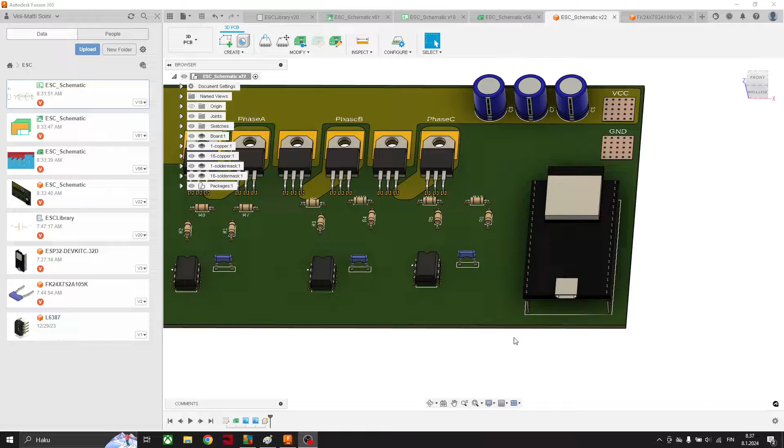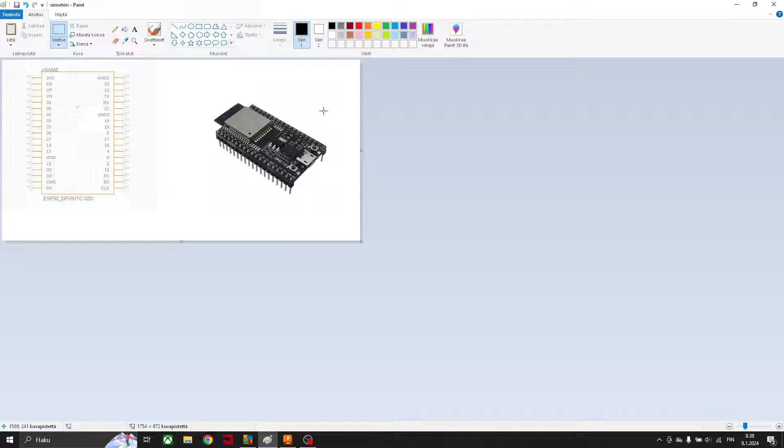In this video I will show you how to create this ESP32 board, so you can use it in some projects like this, this brushless DC motor control project. So this ESP32 is from this. There are not all details, but these dimensions are correct, so it can be used in a project.

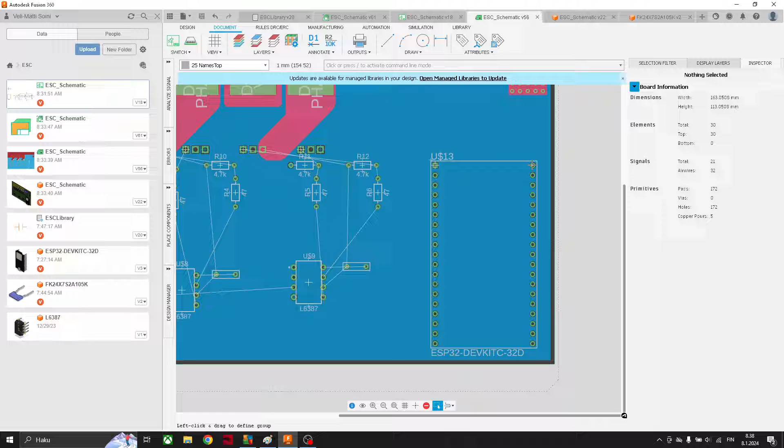So first we will create this symbol which can be used in schematic, and after that we can create this layout, footprint for this component, and last we will create this 3D model.

So I will start by using this library I have created, and I will create a new component. I will name this like this because I already have this component here. And after this we can create this symbol. I'm gonna use this same name.

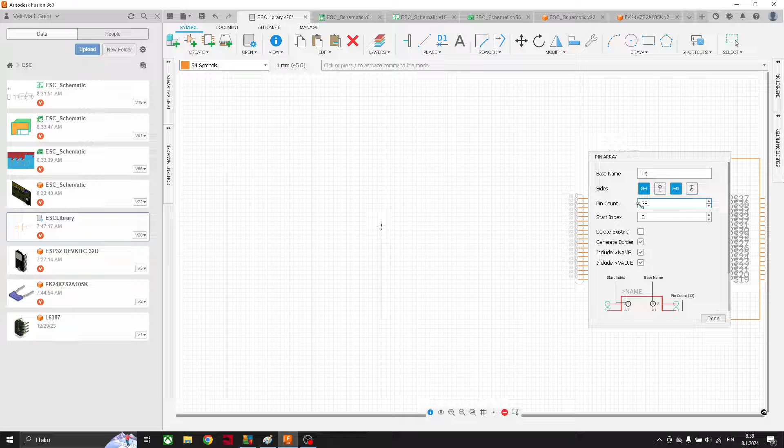From here we can select this pin array, and this ESP32 has 38 pins, so it has chosen from there, and we can place it here. Now we have to make this a little bit bigger, and we can move all these pins here. This will take some time, and I will pause video now.

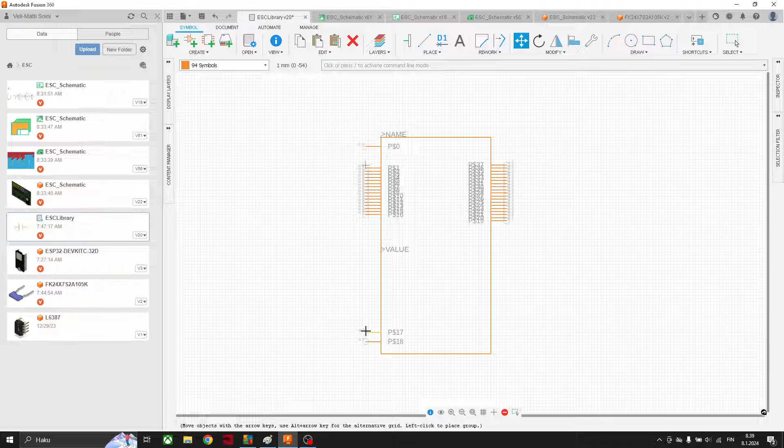So now I have placed all these pins here. Usually I do it like this, that all these have this 1 millimeter and then 2 millimeters on top and bottom. But you can change something else if you want.

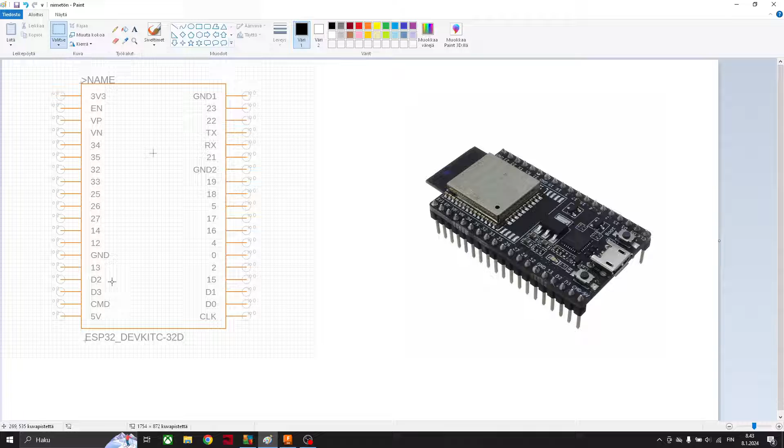Now we can rename all these pins. I have here these pins, which are from the datasheet of this component, so I will use all these same names here. So we can click here, and this first one was 3.3 volt, and then there was this enable pin.

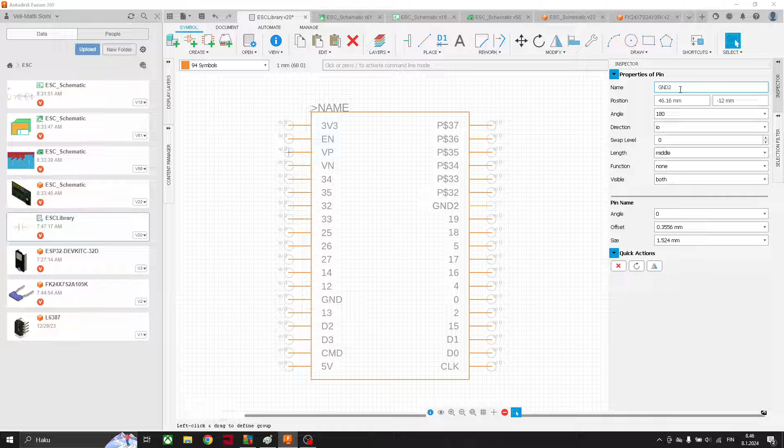And here we can see we already have this ground, and in Fusion we can't duplicate this same ground, so we have to rename it like this ground 2. So now we have renamed all these pins, and we can check that they are all correct.

Then we can add this name for this component. And now we can save this, and then we can start creating this footprint for this.

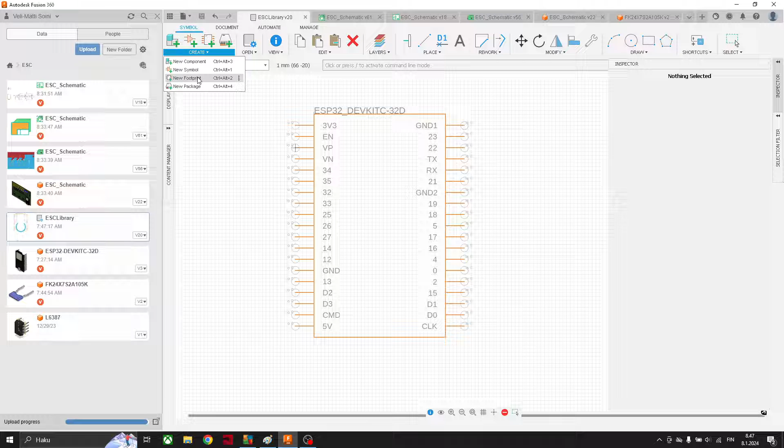So from here we can select this footprint, and from here we can select this one, that array, and again we have this 38 here, and then this pitch spacing is 25.4, and this is 2.54. This is from the datasheet, so we can place it here like that.

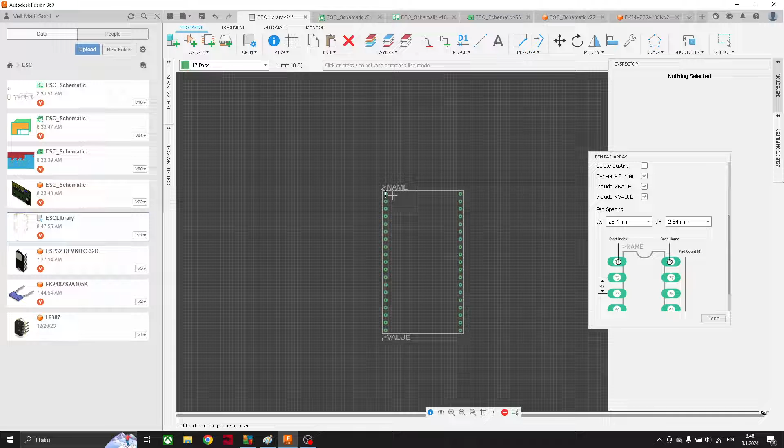And we can change this because this is the first pin here, so we can change this square so it's easier to see.

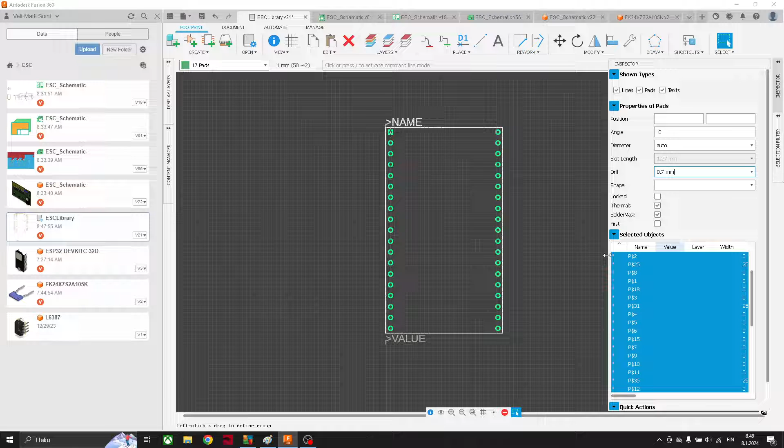And then usually I always also change this drill size a little bit bigger, so there is some tolerance. So we can select them all, and from here, pressing shift, we can select multiple, and I'm gonna change this to 0.7, and now we can see all these holes are a little bit bigger.

Then we can change this also, so it was something like that. And we can save this. Not yet.

We should rename all these pads first, and we should use the same names here. Again, we can start from here, so we just type this, and then this next one, enable pin. And I will pause video now.

So at this point, it is a good idea to double check all these pins match and they are named correctly. I have the ESP32, so I can check from that all these pins are correct.

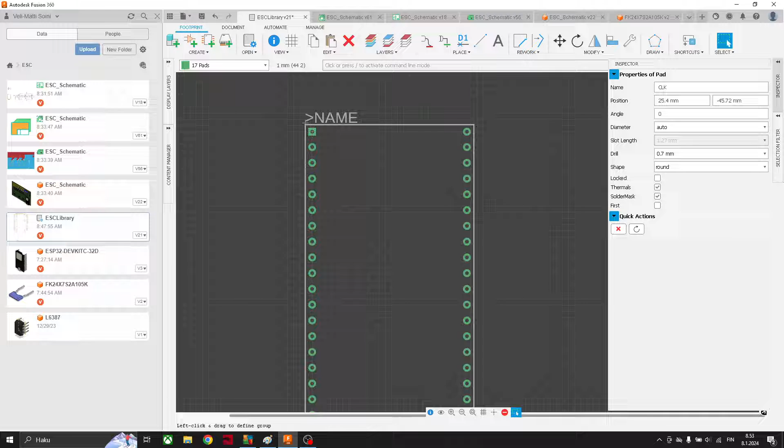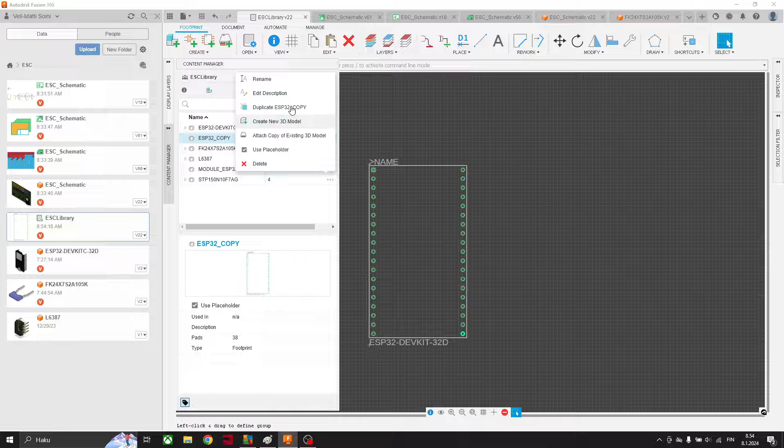And now we can save this footprint. And then we can go to this content manager. So here we have this footprint from this menu, and from here we can click this and now we can create this 3D model for this. When we create the 3D model this way, it's easier because we have this footprint here, so it's much easier to create the 3D model, so it matches this footprint.

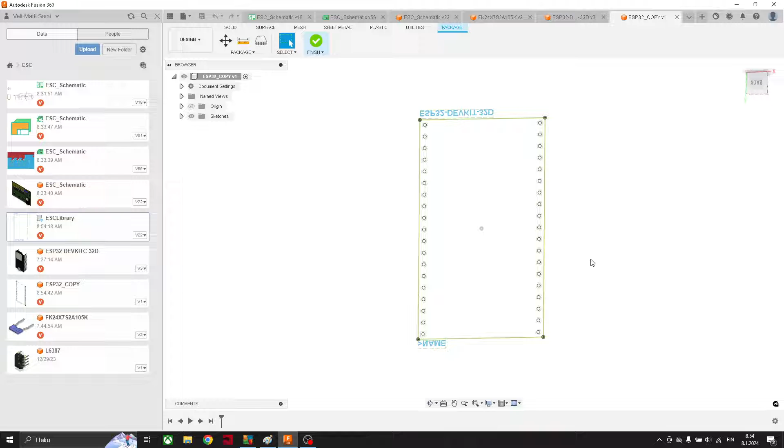So this line here, this is where the PCB is. So if we draw something here, it will be the top of that PCB.

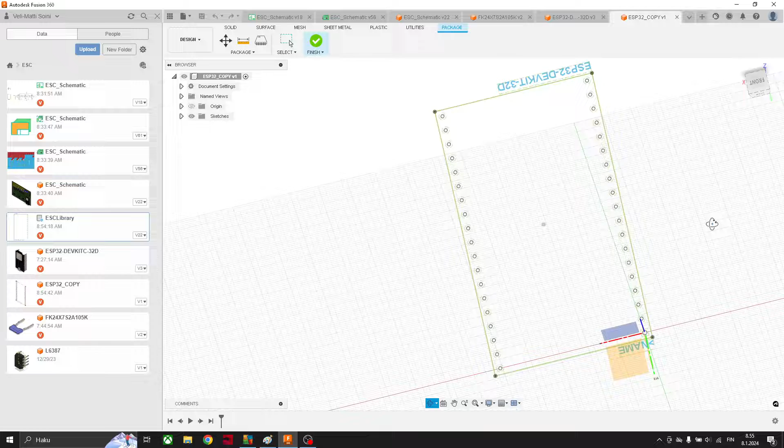So we can start from... okay, so now it's correct. So this front should be upwards. And now we can click from here.

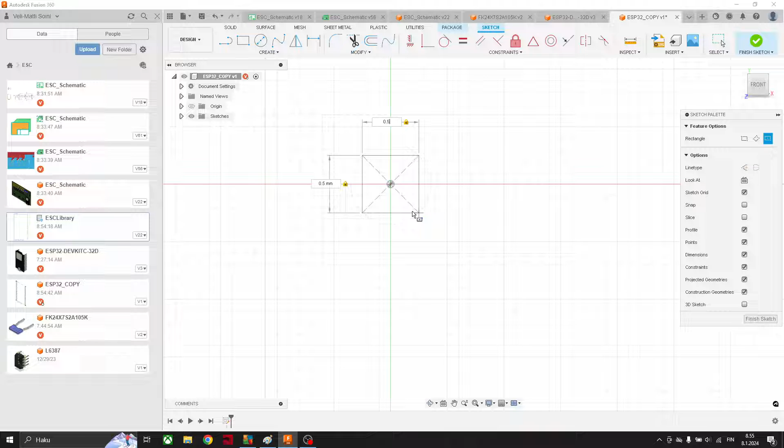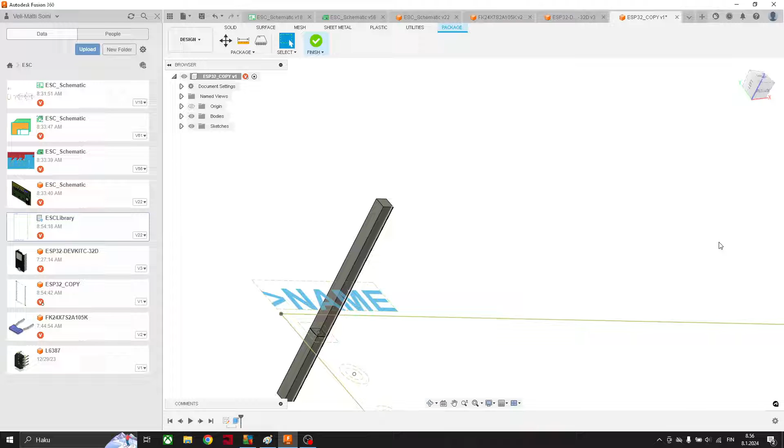So the way I have created this, I first draw this one rectangle here, and it is something like 0.5, and then we can extrude this. We can change these values later, I'm just now gonna use some values here, something like this 3 and 6 millimeters. And now we can change this color for this, I'm gonna use this copper.

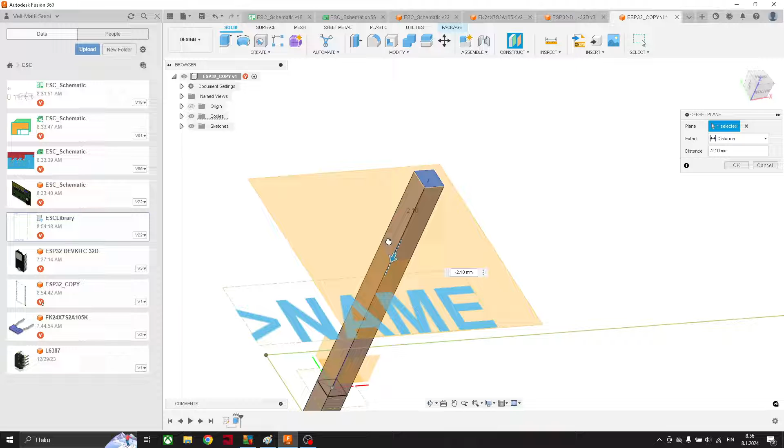And then we can use this offset plane and click from here, so now I start drawing the PCB. The PCB is something like 1.6, and then after that there's a little bit of copper, so we can start it from let's say this 2.1.

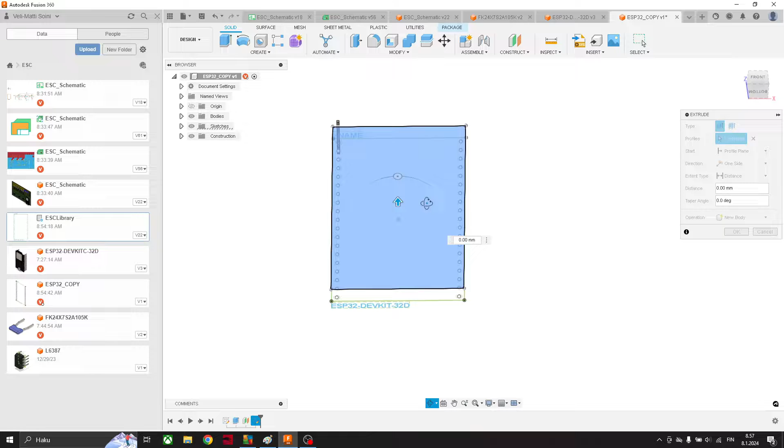From here we click that construct plane, and now we can press P so we can project all these lines from this footprint, and with E we can extrude. I'm gonna use this 1.6, and for this operation we use new body and click OK.

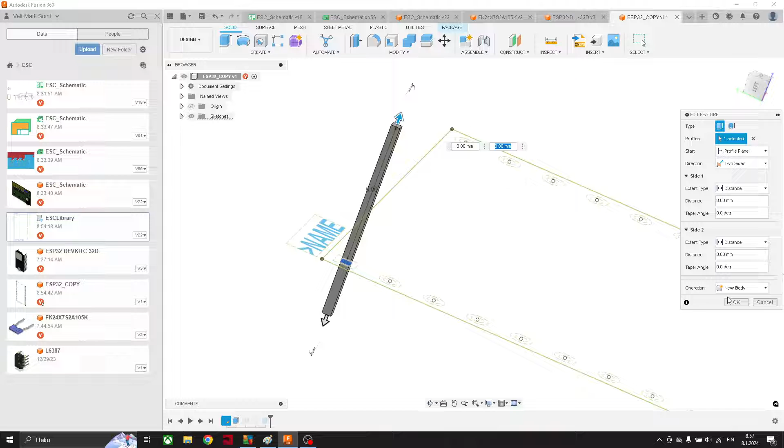Now we can see that maybe this would be a little bit longer, so we can edit from here and just edit this better. So that might be better for now, and then we can create this.

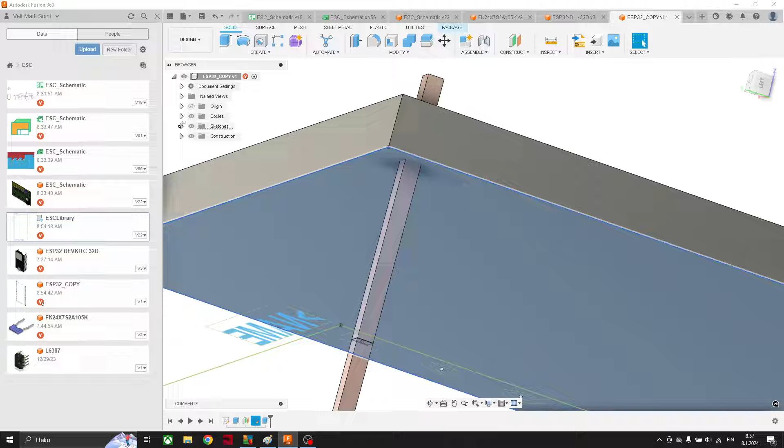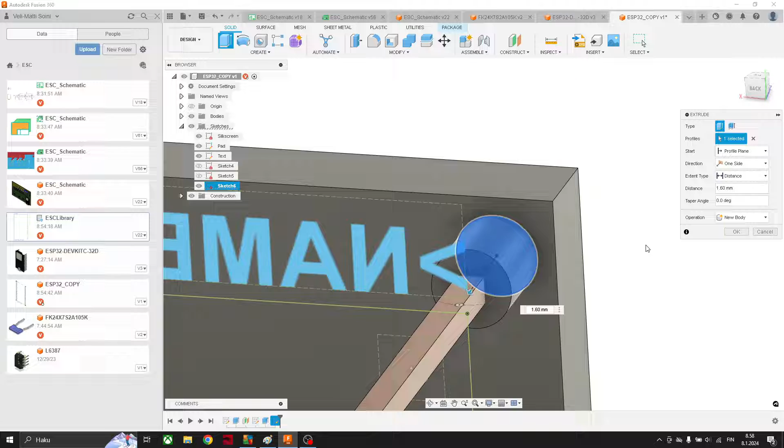We have these plastic things here, so we can create them next. We click, and turn off this sketch first, and click here. The plastic is something like 1.5, and we make new body, and maybe it's 1.5 also, and then we can add color for that.

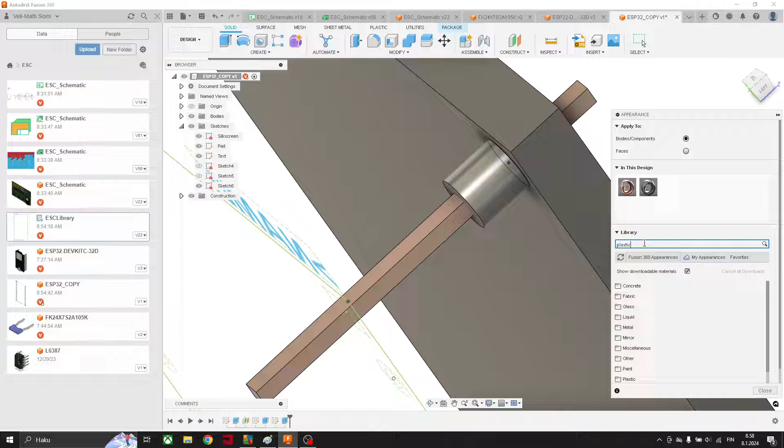I'm using this, and for this color I'm always pressing Ctrl A. So I'm using this one, and now we have that.

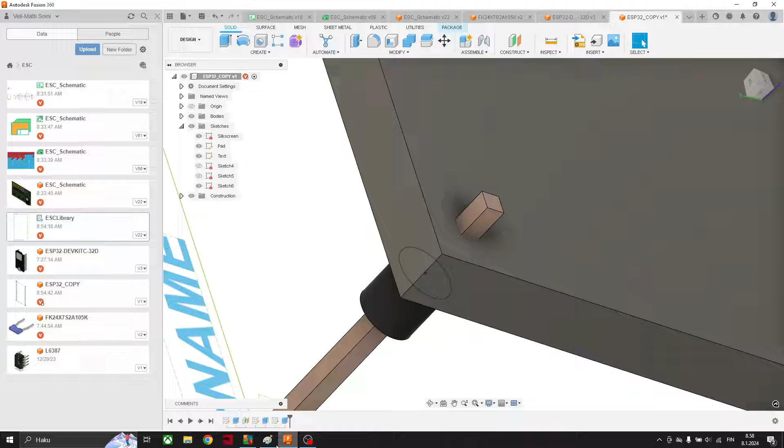After this we can already make a pattern of this if we want. If we want to be more precise, we can also add this shoulder there, but usually it doesn't look very good, but we can try.

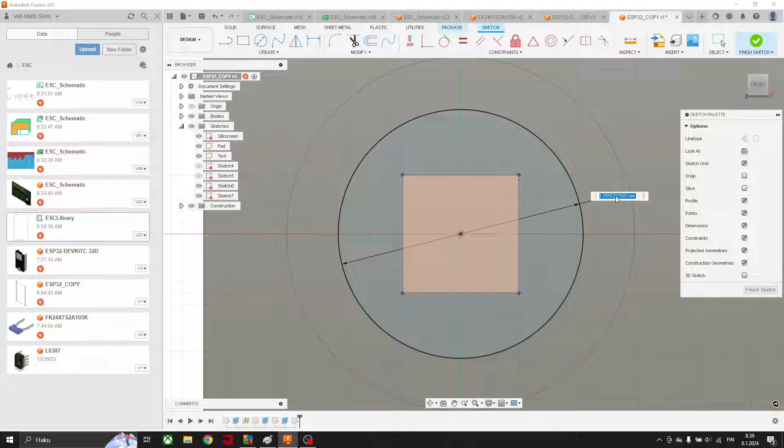I'm gonna project that and then create this circle. By pressing C we can create a circle faster. Let's say this shoulder is something like 1.25.

Then we can extrude that, I'm gonna use new body again, so let's extrude it there. And with this chamfer we can make it look more like shoulder based.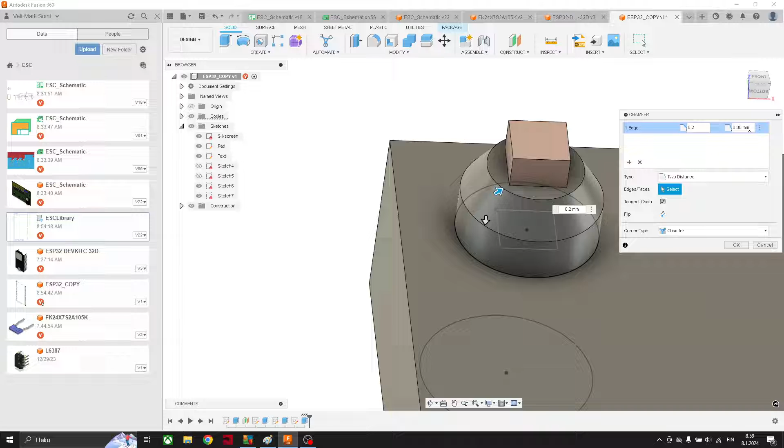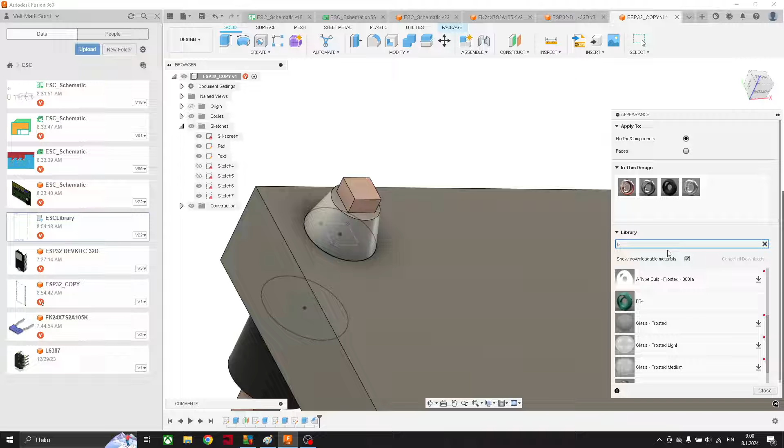Yeah, maybe something like that. Now we can add, here should be this LED, so we place that there. And we can also change the color of this board so it looks a little bit better.

We can edit this FR4 value. ESP32 is something maybe like this. And now we can close this.

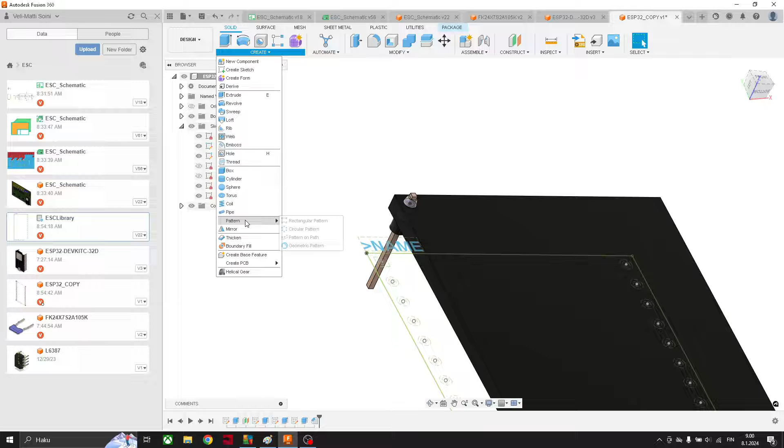From here we can create this pattern. All this is bodies, so we can just click here, and this one, and that - so we have total these 3 bodies here. Then we can select axis, so we click from there and there.

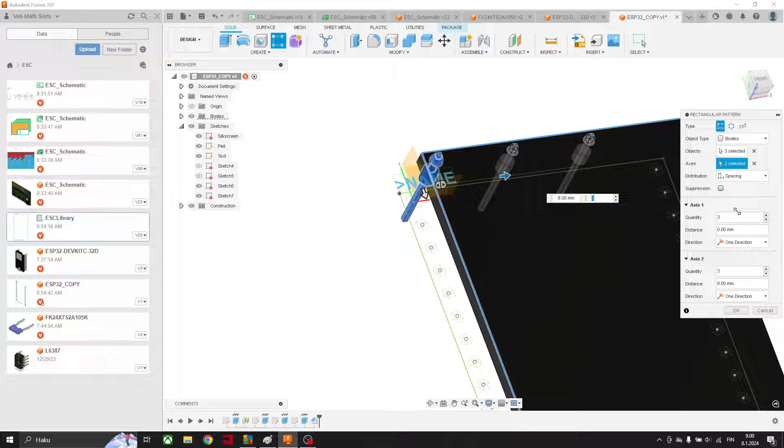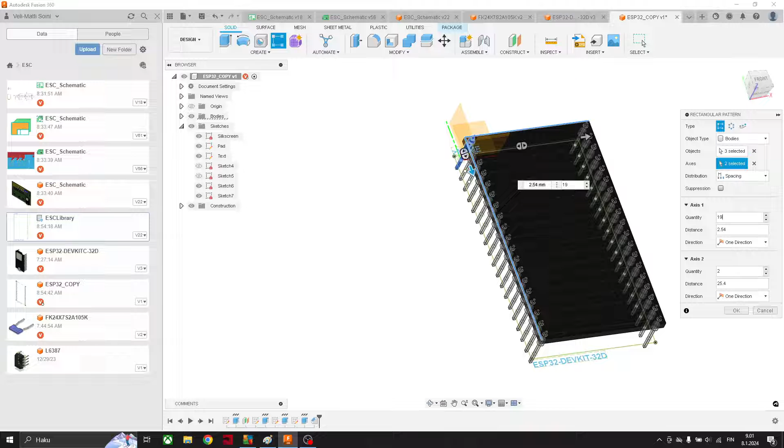I'm gonna use this distribution spacing. So there was 2 and this was 25.4, so it goes there, and then this was 2.54, and there's a total of 38, so it's 19 on one side, like that. And now we have all these pins here.

So it already looks pretty good. Now we can create some USB ports here, so I'm gonna click this. I don't know the real dimensions for this USB port, but I'm just gonna make some placeholder here.

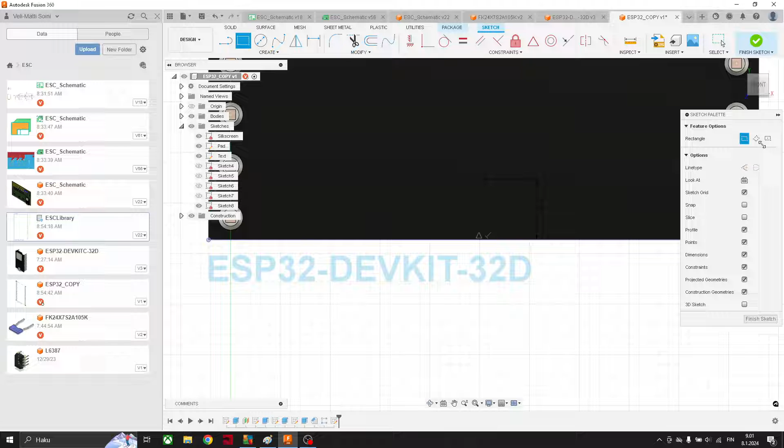So I think it's something like 7 and 7, and this would be like 2.5. Now we can extrude this, it's 2, and new body again.

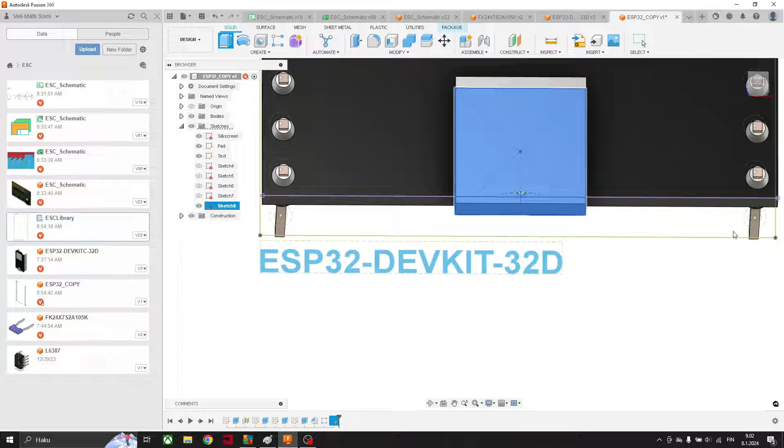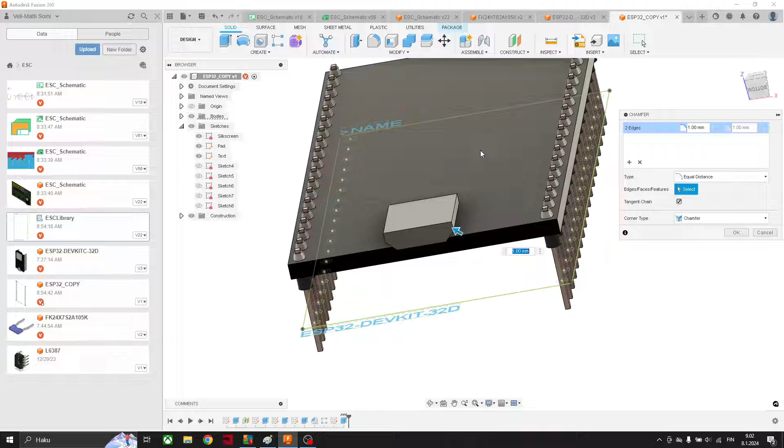And then for this we can change this equal, and it's something like 1 millimeter. So these dimensions don't really matter because this is just a placeholder component. And then this is okay.

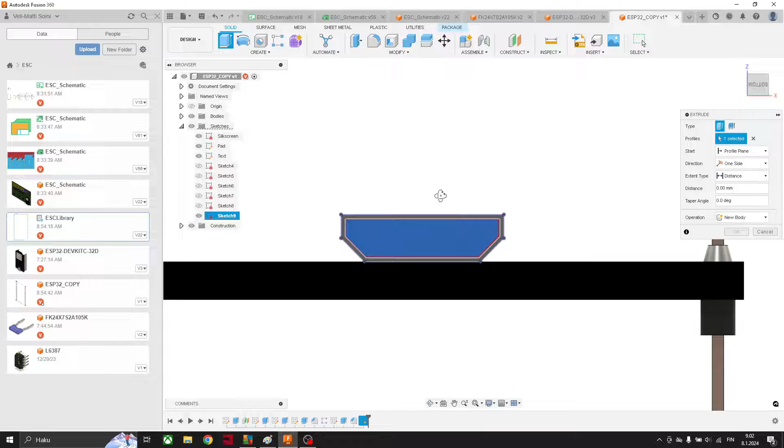Now we can click this and project this, and we can create an offset by pressing O. Let's say this is something like 0.2. And now we can extrude this, and we have this like there, so now it's looking a little bit like a USB port.

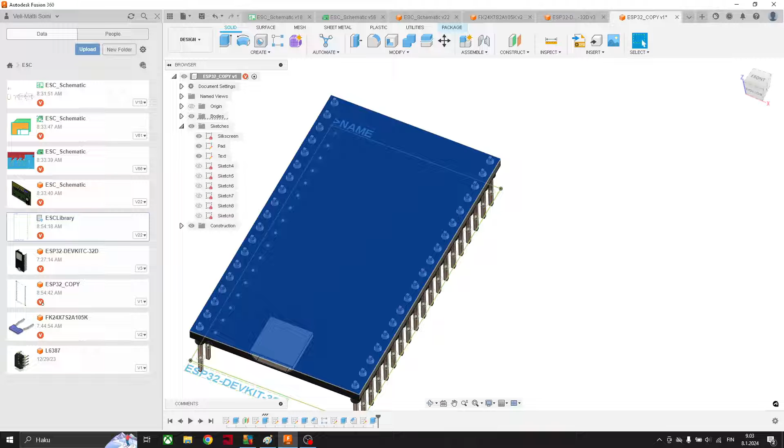And then we can create here this where the chip is. I have to pause the video now because I will check the dimensions, so I will use these dimensions for the chip. So we can start from here.

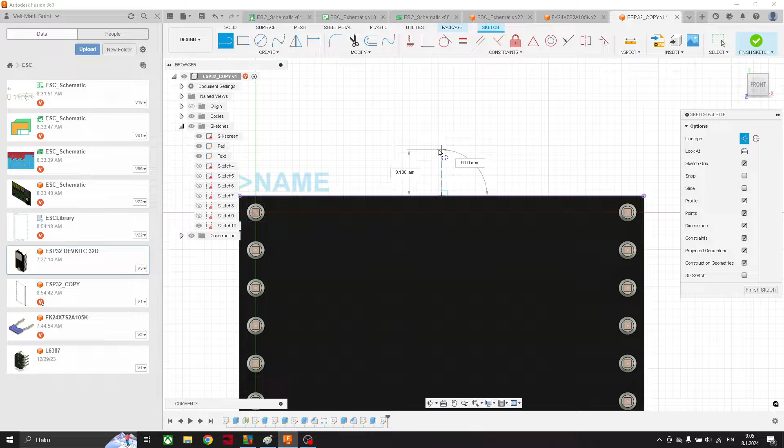And we can project this line, and there it was 5, and then it was this - it was 17.5.

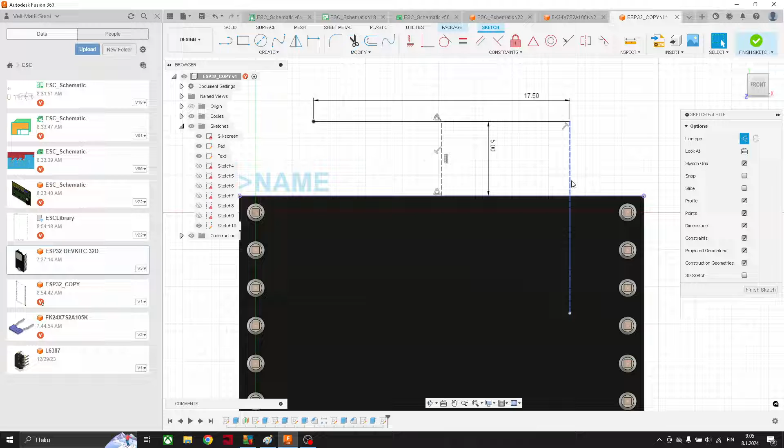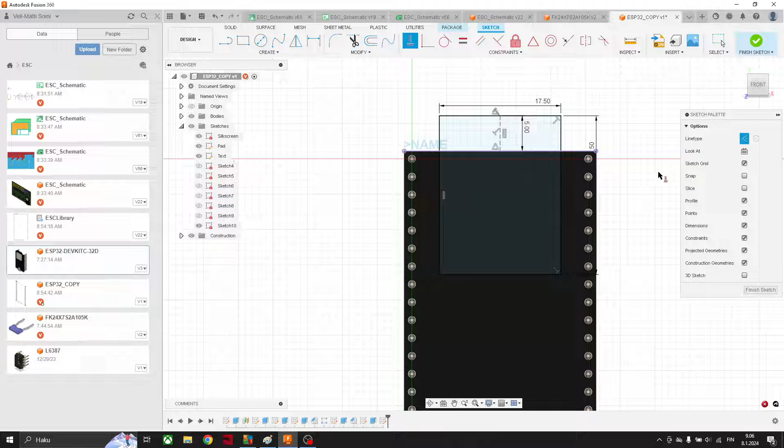Pressing X, we can change this construction line type. And then we can make this horizontal. And now that should be okay.

And we can extrude this, something like 1 millimeter. And we can click here, and I'm gonna project this, and then I'm gonna project also this one.

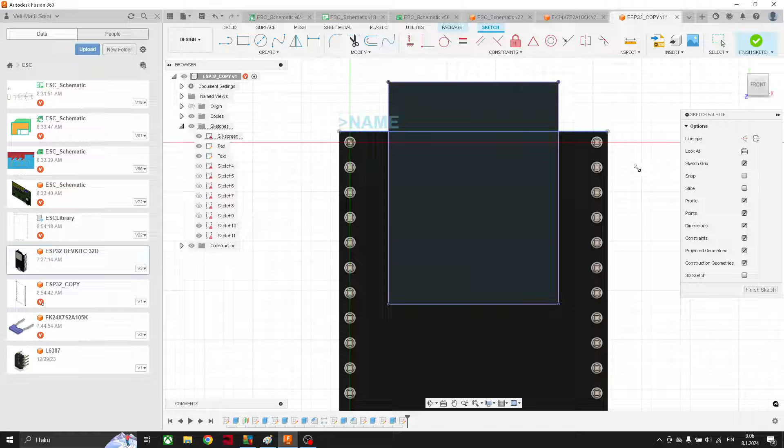And then I'm gonna use offset, this offset tool, and this is like minus 0.2.

And I have to draw a line here. I'm gonna press this D hotkey so I can make their dimension. So that's 0.22.

And now we can extrude this. So this is something like 2, and I'm gonna use this new body for that.

And this is, I think it's the same color as that one, was it?

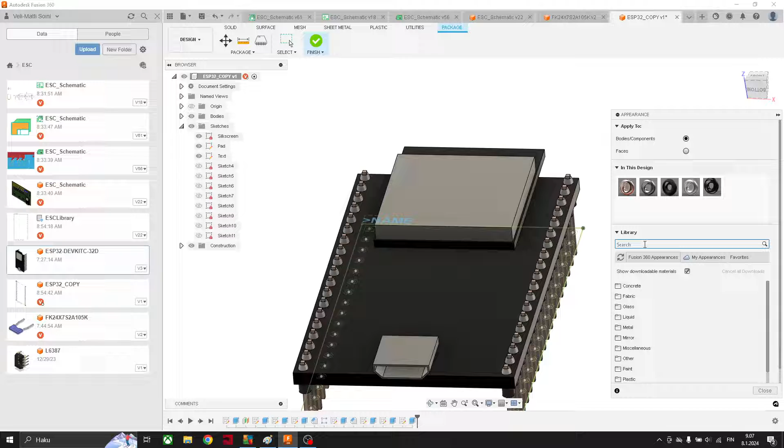Maybe we could put aluminum. So I'm gonna change that aluminum, and this one, and also this.

So now we have pretty much all that there, and now we can save this first. And then we can click this finish.

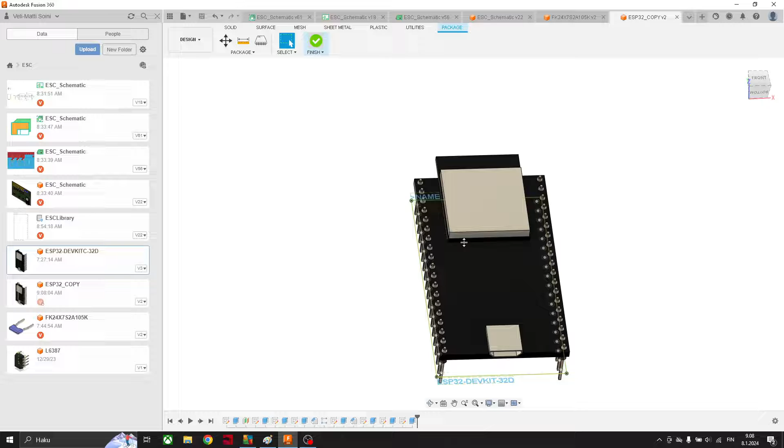And we can save all these if there is something like that.

And then we can go this from here, this component. So there is this ESP32 copy we created. So now we have all these footprint symbols and 3D model.

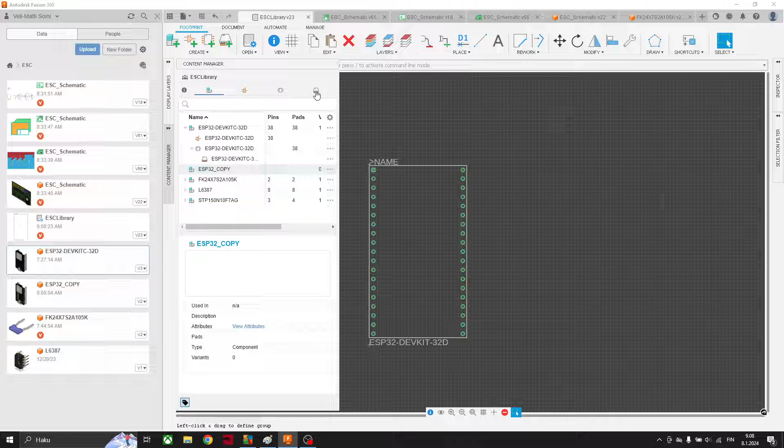So we can go here, and then from here we can click this add device. And here we have this copy.

This is my original ESP32 and this is the copy. So I'm gonna use this copy now, and then I can place it here.

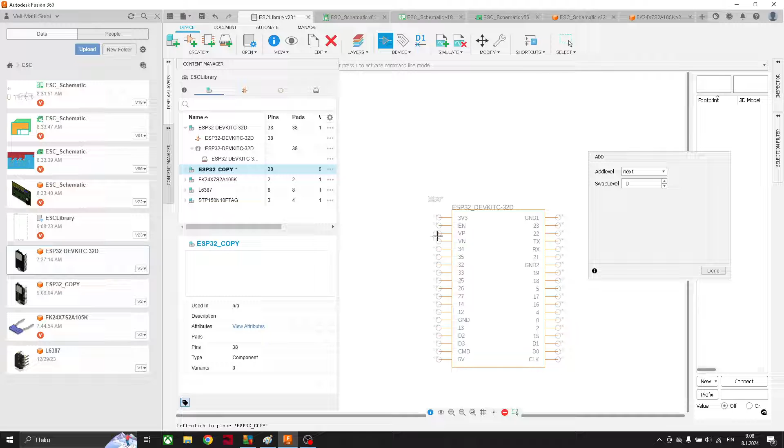And then from this menu, we can use this new local package. And then we have this copy here. This one is the original and this is the copy.

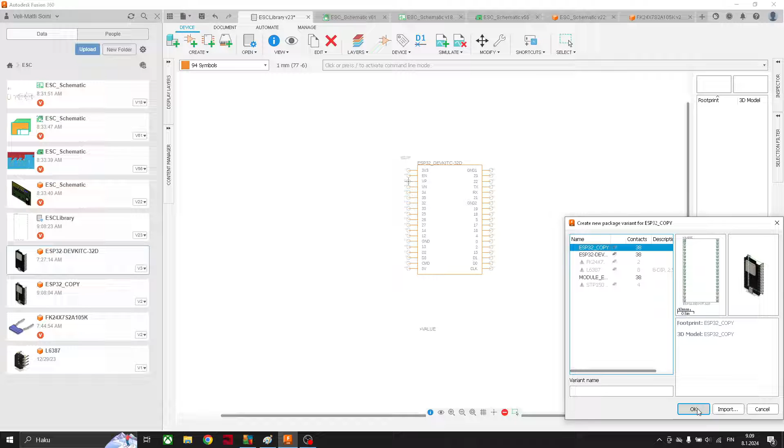And we can see there is this some sketch. We can turn off that so it doesn't show there. So we can press OK now.

And then we can from here disconnect. And now we have to connect all these footprint and this pad pins, I mean this symbol and pad pins.

And they all should be correct, but you should double check they all match. So we can start from here.

And it is important to double check all these are correct, so they match. Sometimes they could be in wrong order.

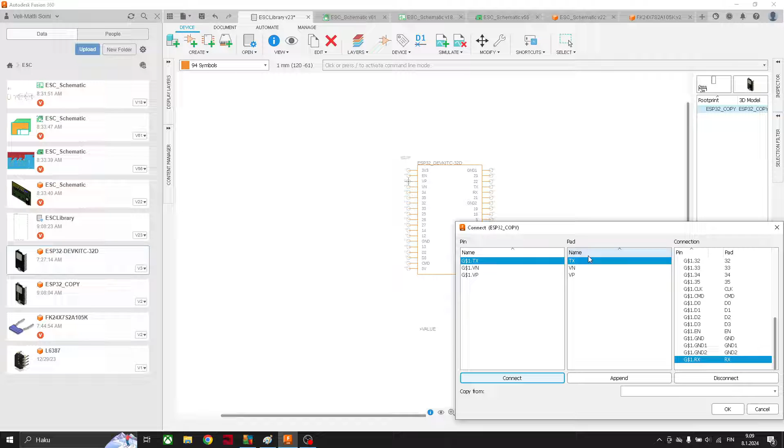So now we have all that, and then we can save this. And I'm gonna go to this schematic so we can try how that works.

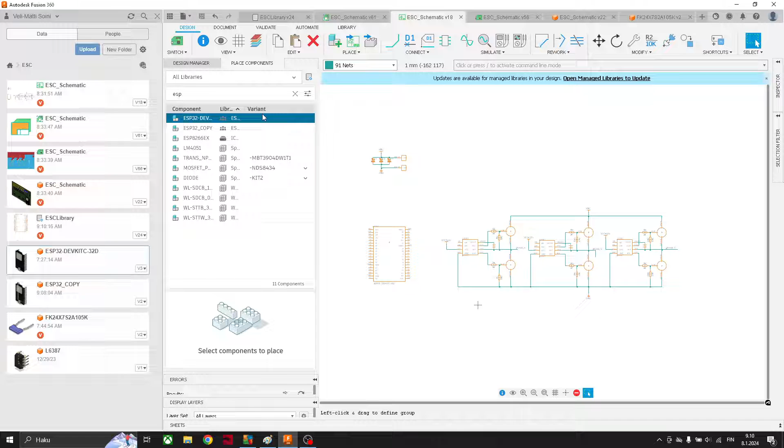So from here we have this place components, and then this is the copy we just created. So we can double click that and we can place it here.

And we can already see like this is a little bit odd that is there, so we can edit that. And I'm gonna just save now. We have to always save this, so it will update this schematic here, all these things, loading things.

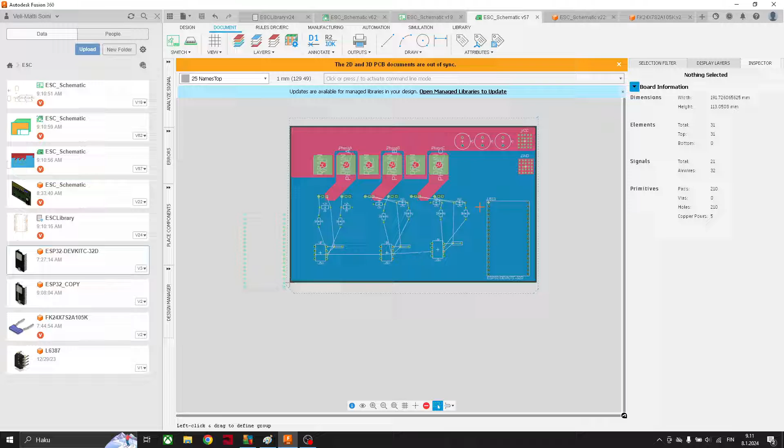And now we can open this schematic. I will move all this a little bit here so there's some space for this new component.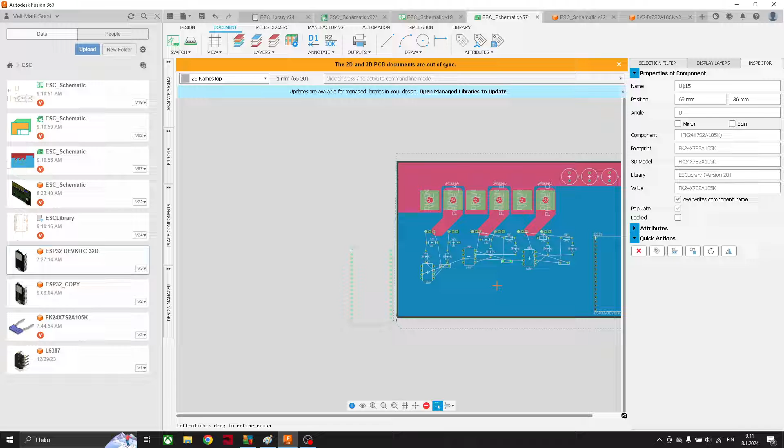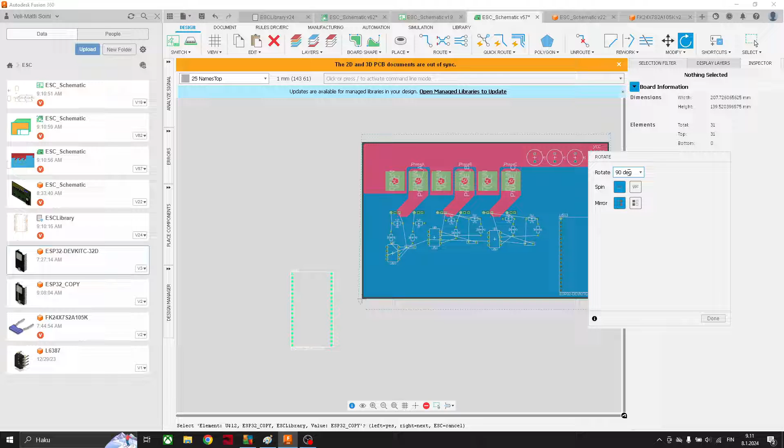So maybe we can, maybe there is enough space. So we can place it there now so we can see how it looks.

So this footprint looks fine. And now we can save this.

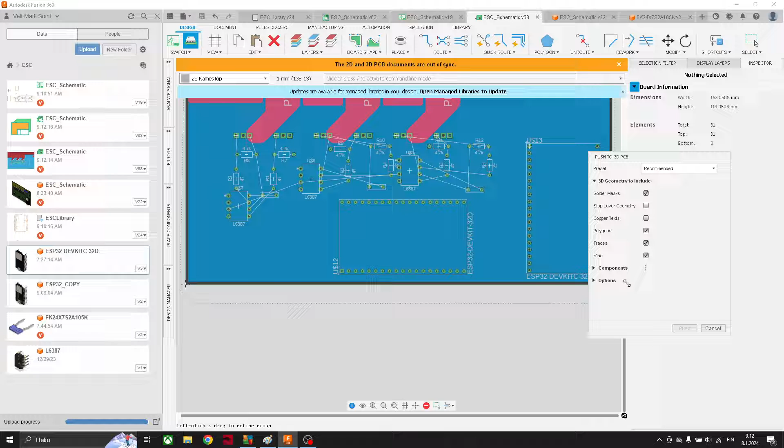And then we can click this push to 3D PCB. Now we can click that.

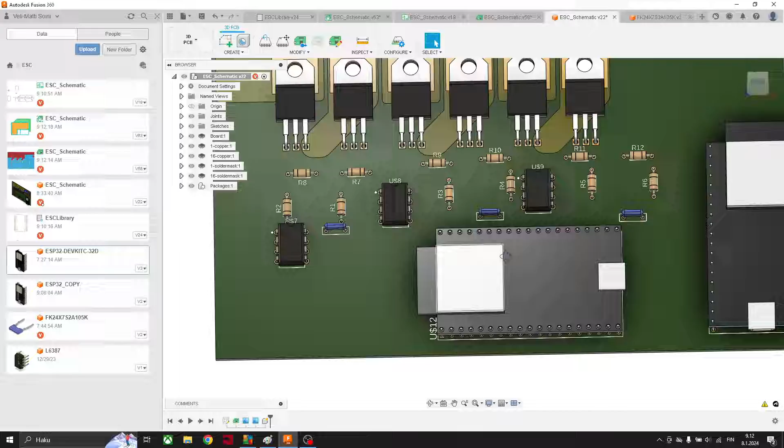So here is the new ESP we just created. So it looks okay to me. Here is the original one and this is the new one.

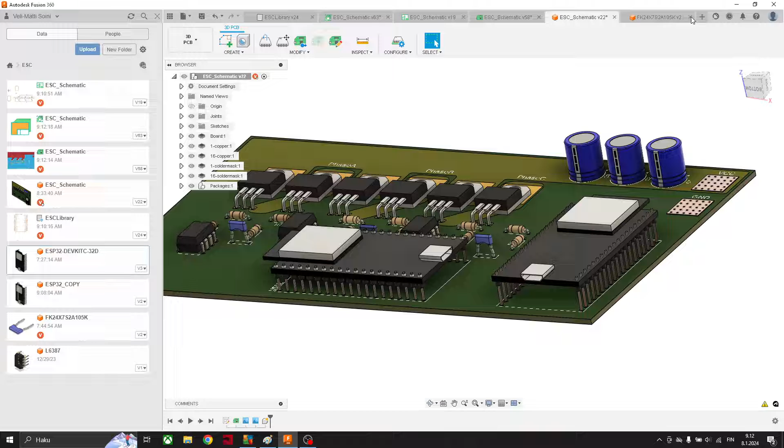And we can see in this original I have used longer pins here, and this one has a little bit shorter. I will close this now, I don't save this version.

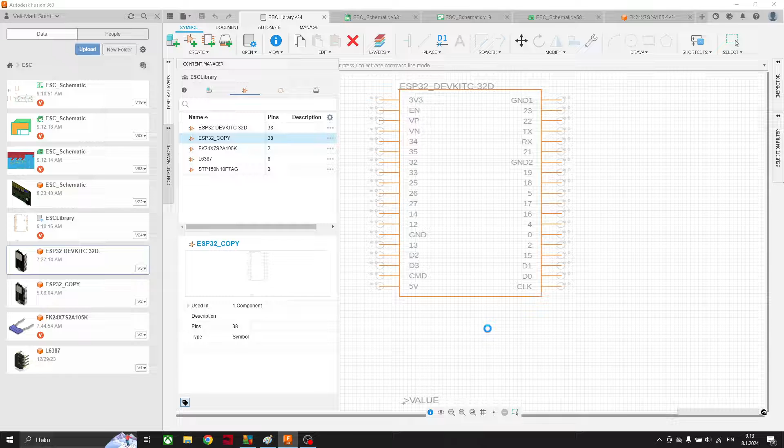So it was this one. So we have to go from this symbol and we have to double click this. Now we can edit this one and we can move it here.

And we don't really even need this value there, but I'm just gonna leave it there. And now we can save this. We could also just delete this if we want.

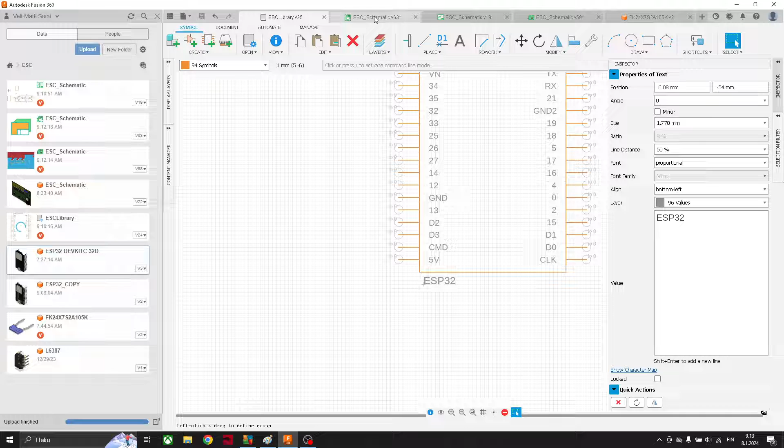And now when we go back to this schematic, so here we can see it has this older model, but if we go here and then we have to double click this, so it will update this new model here.

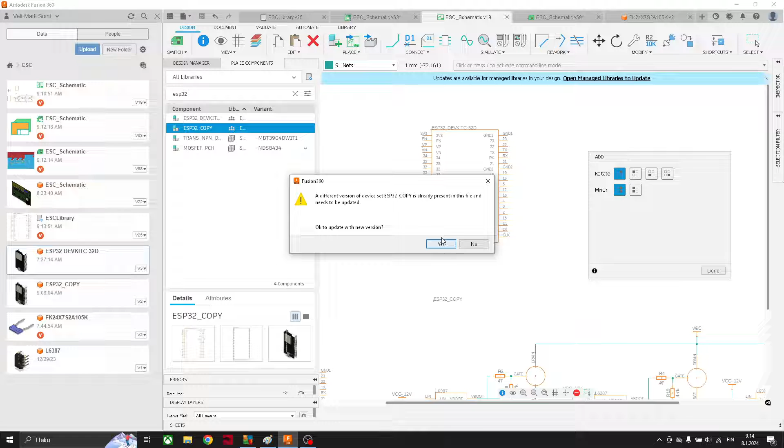So now it will say that there has been changes and yes, we want to update. So now it changed and that's there. Yeah, and that's it.

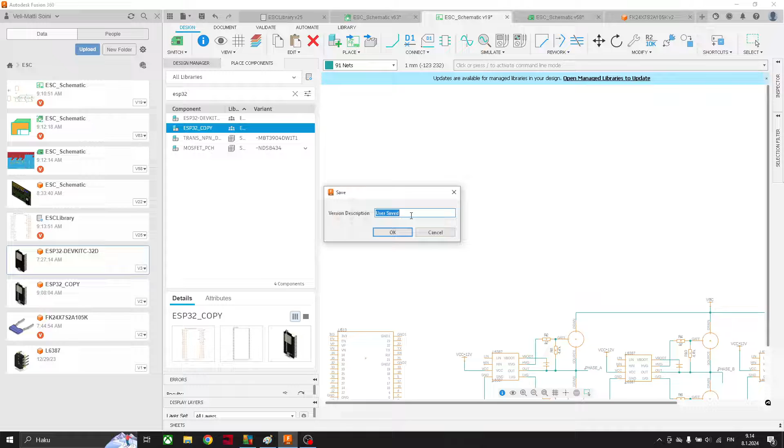I'm gonna delete this from this schematic now because that was just for this tutorial. And now if I save this, it will update this PCB here.

And once we go here, so we go here now, that ESP copy has disappeared.